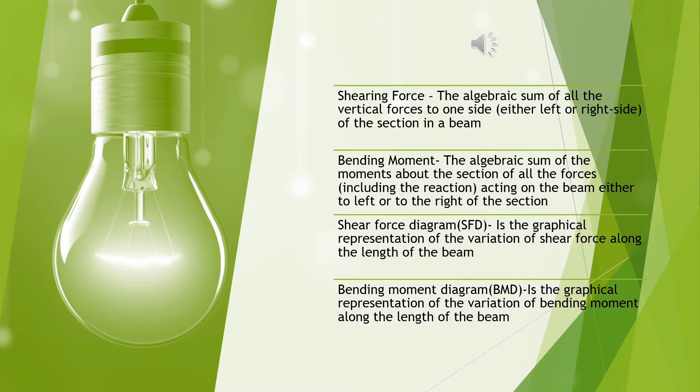In the next slide, we can see a sample of shear force and bending moment diagram of a simply supported beam with a concentrated load at the midspan.

So I'll show you one example of a beam with shear force diagram and bending moment diagram. Hope it will help you in your studies.

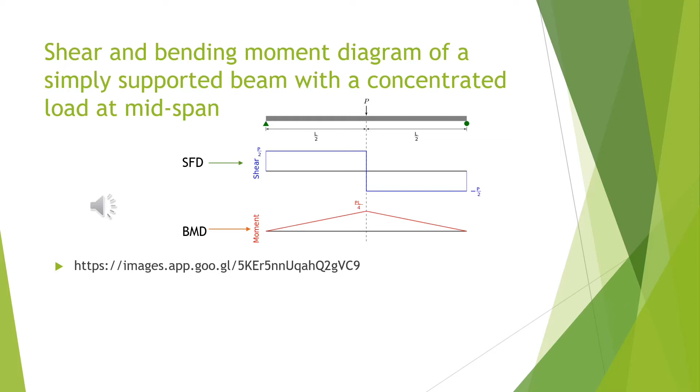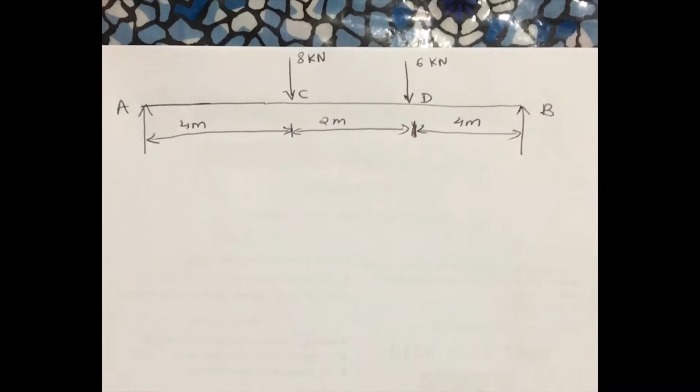Let's find the shear force diagram and bending moment diagram for the beam shown. Let's find the reaction forces at RA and RB.

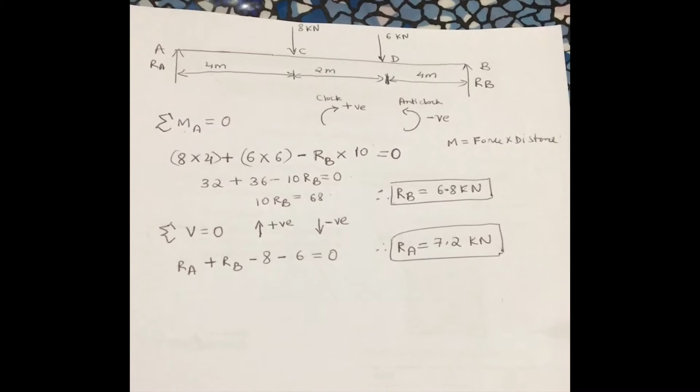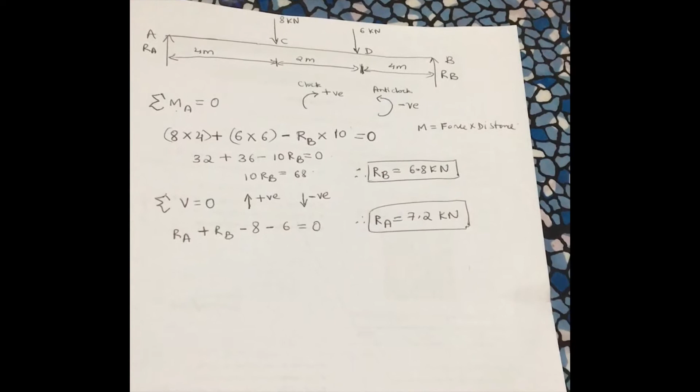For that, let's consider moment at point A as 0, summation of moment at point A as 0 when moment is force into distance. Since 8 kilonewton and 6 kilonewton are pushing the beam downwards in a clockwise direction, it is considered positive force.

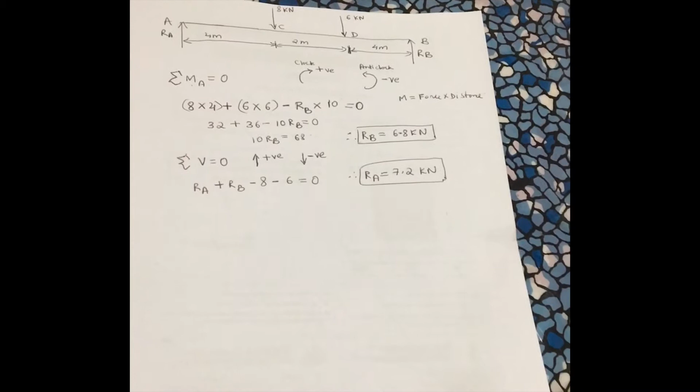So 8 into 4, moment is force into distance, so moment of A from the point C is 8 into 4 plus moment of A from point D is 6 into 6 distance, and since the RB force is pushing the beam upwards in the anti-clockwise direction, it's considered as minus RB into 10.

So we get the value of RB. And next is the summation of all the vertical forces. Upward force is considered as positive, downward force is considered as negative. From this we get the reaction value at the point A.

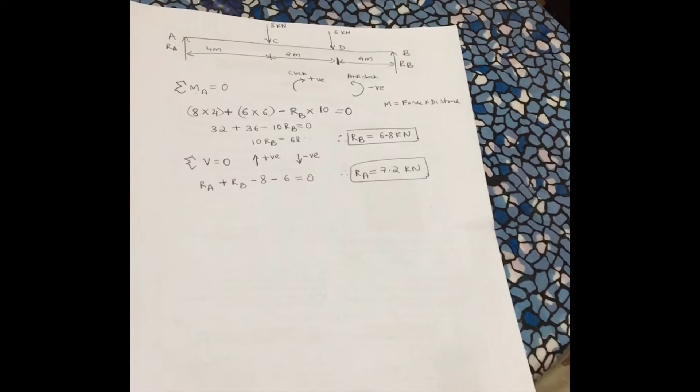And for the moment, just remember that the 8 kilonewton and 6 kilonewton are pushing the beam below like this. So moment at A, 8 kilonewton is rotating the beam in the clockwise direction, so it is positive.

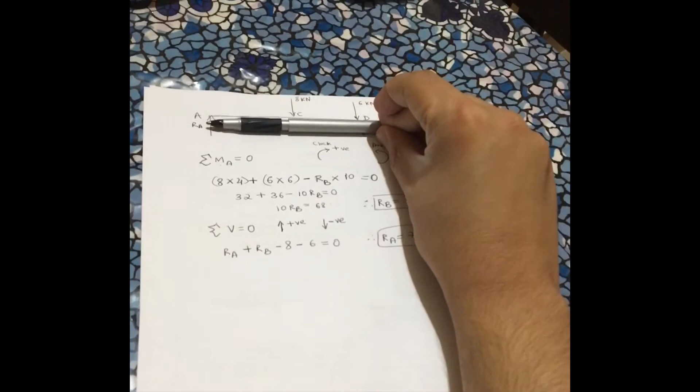Moment at point A with respect to force D is making the beam rotate in clockwise direction, so it's positive.

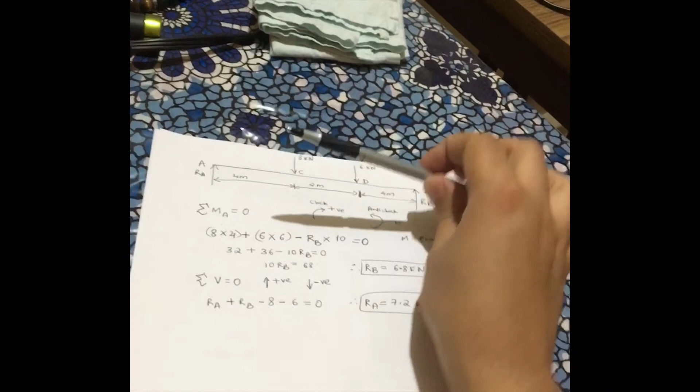And when you consider with point B, the RB is pushing the beam in the counterclockwise direction. Just keep your pen at the point A and just consider the RB, and it's pushing in this direction.

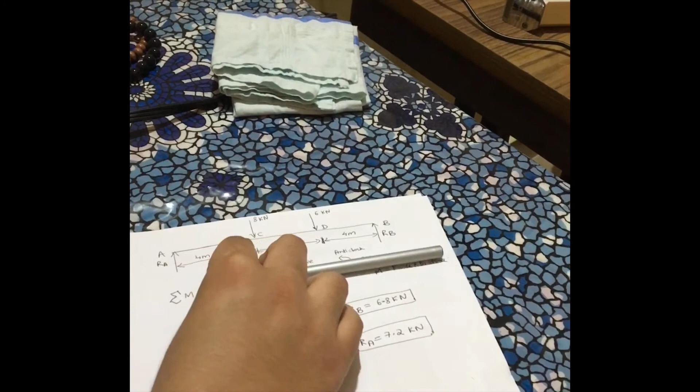Calculation of shear force diagram. The upward force is considered positive, downward force is negative. Let's consider at FA, which is equal to the reaction force RA, that is positive 7.2 kilonewton.

Between A and C there is no other load, so at FC, between A and C, which is considered as FC, that is 7.2 kilonewton minus 0. There is no force, so the 7.2 kilonewton remains constant.

So at the point C there is 8 kilonewton, so since it's going downwards it's considered negative, so plus 7.2 minus 8 is equal to minus 0.8 kilonewton.

And between C and D, which is FD, that is equal to minus 0.8, which remains constant. So minus 0.8 minus 0 is minus 0.8 kilonewton.

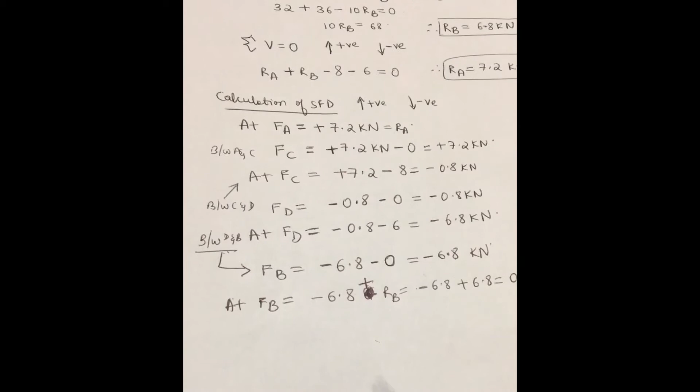At the point D, we have FD, that is, we'll carry the previous minus 0.8 kilonewton and subtract 6 kilonewton since it's going downwards. Then between D and B we have FB, which will remain constant since there is no load between D and B. So minus 6.8 kilonewton is constant.

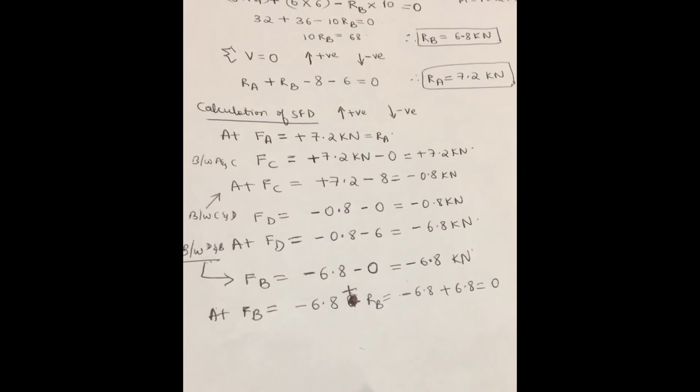At FB we have reaction force RB acting, so minus 6.8 plus RB, since the RB is going upwards it's positive, so minus 6.8 plus 6.8 is 0. When you draw the shear force diagram, we got the RA value as positive, so consider this as the 0 axis, this is positive y-axis and negative y-axis.

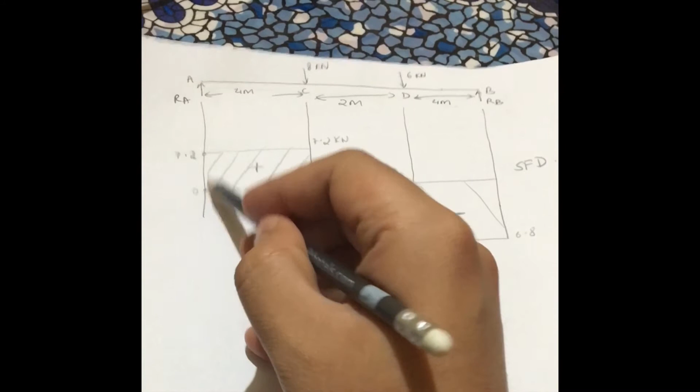So since we had got RA as plus 7.2, we'll mark a point at 7.2, and since there is no other load in between C and A, it remains constant, so we mark the next point at 7.2.

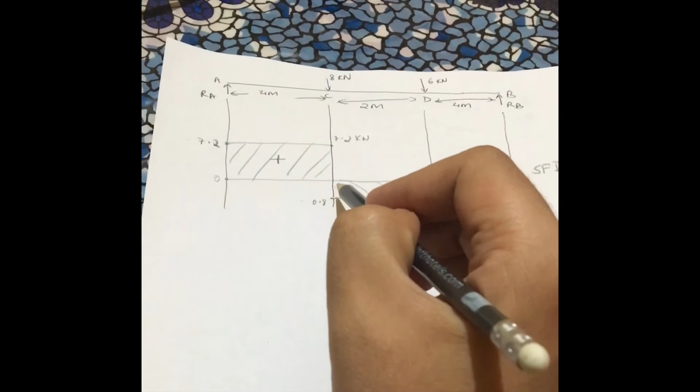And since we got the vertical force at C as minus 0.8, we go down to 0.8, and then since there is no load between C and D, the 0.8 value remains constant.

We draw a line as below, and at D we get minus 6.8, so we go down below till 6.8 and we mark 6.8 over here.

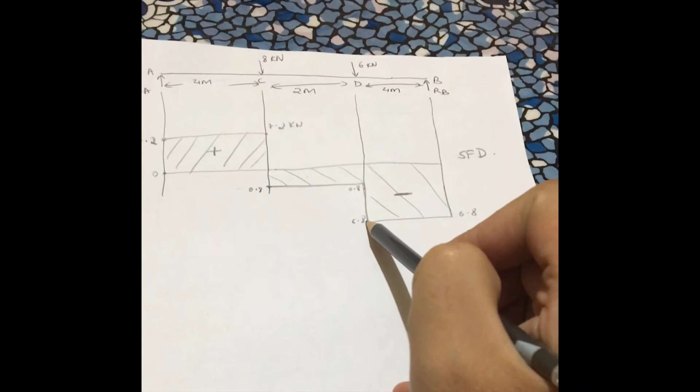And since there is no load between D and B, the 6.8 value remains constant, and since RB is 6.8, we close at B. So this is the shear force diagram for the above problem.

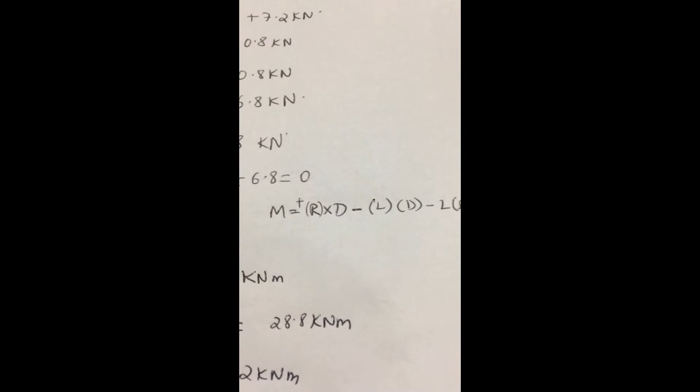For bending moment diagram, remember this formula: M is equal to R into D minus L into D. L is the load, R is the reaction force.

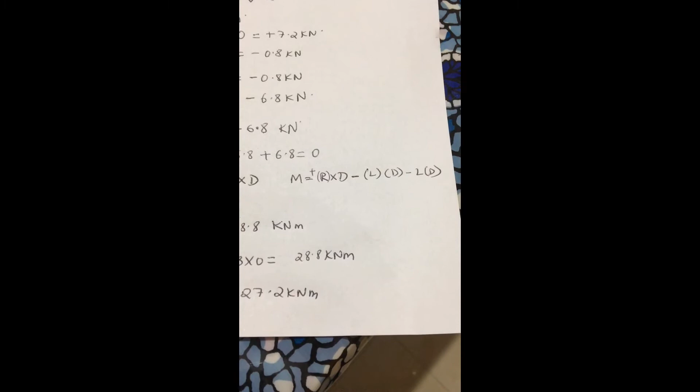So moment at A is 0 since there is no moment at the point A, and moment at B is 0. To find the moment at C,

just keep this point, so we know the reaction force 7.2 kilo into 4 and minus 8 into 0.

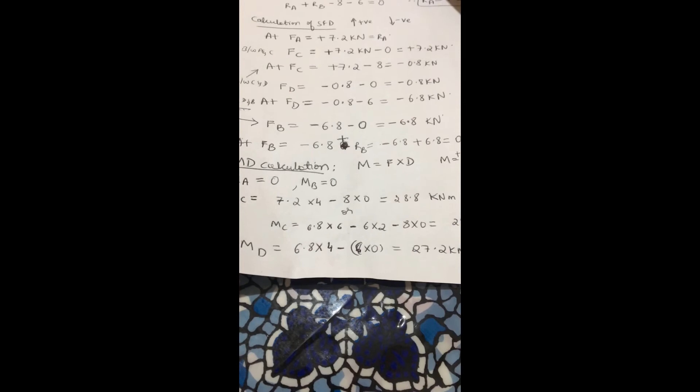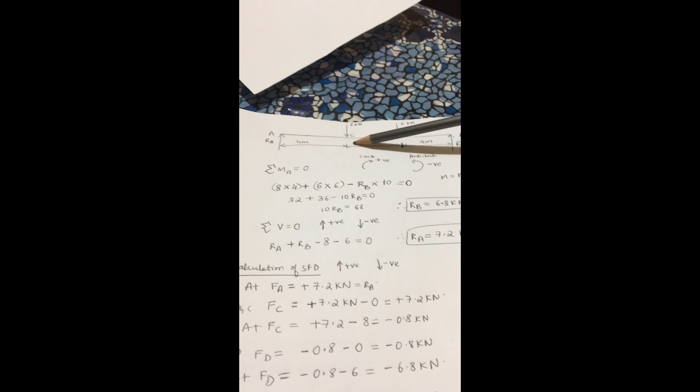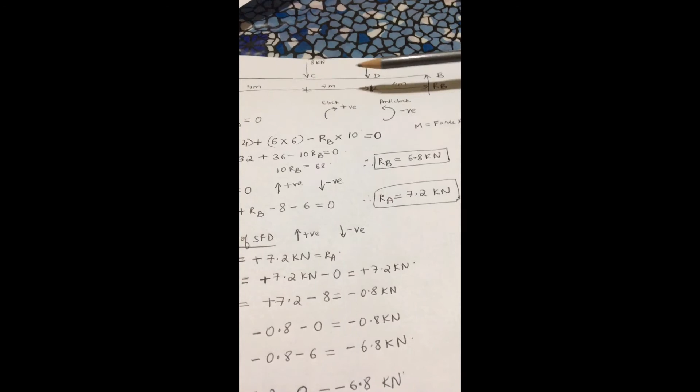So MC can also be found out in the other way. Just keep a point at C, so R from here will be RB, which is 6.8 kilonewton into the distance from here to here, which is 6, so 6.8 into 6 minus the 6 kilonewton into 2 minus 8 into 0.

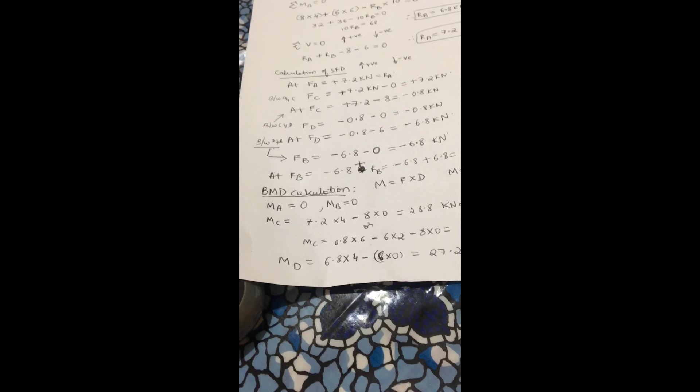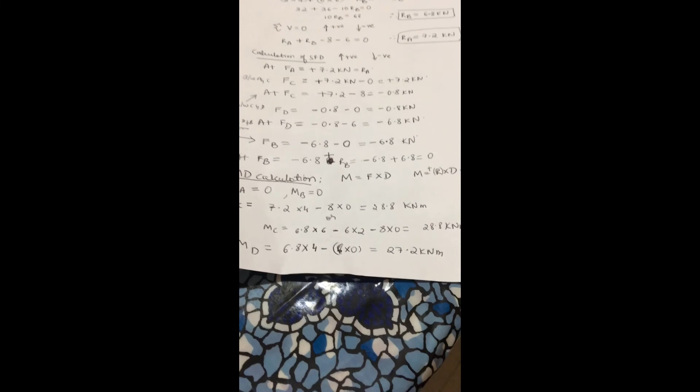At C there is no distance, and at MD you have to find RB into 4 minus 6 into 0. RB is the reaction force, so R is the reaction force, D is the distance.

So you either start from left or right.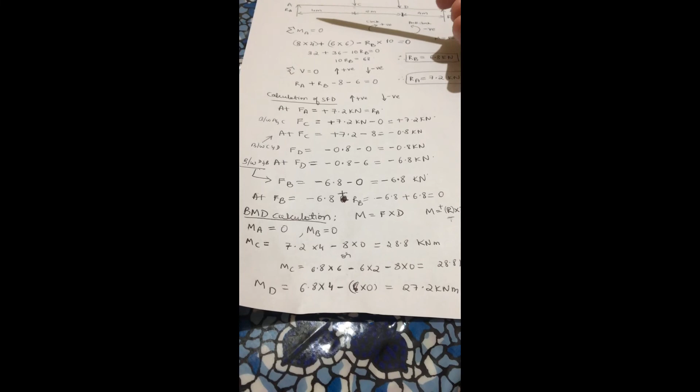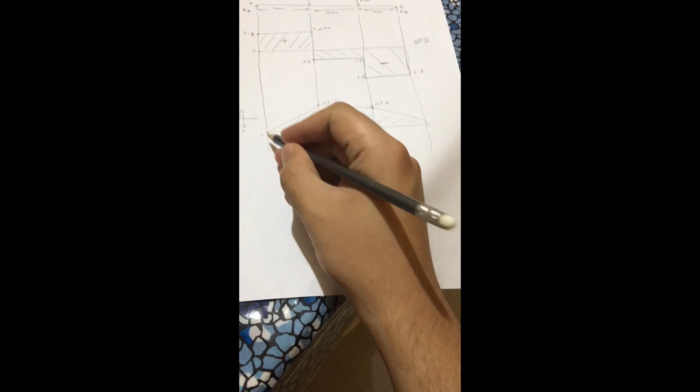Since we have found all the moments at respective points A, B, C, D, so at A it's 0, and at C, moment at C is 28.8 kilonewton meter.

So we mark a point and draw a line, and at D, moment is plus 27.2 kilonewton meter. So just below 28.8, a little bit down, then you join like this at the point, and MB is 0, so this is the 0 point.

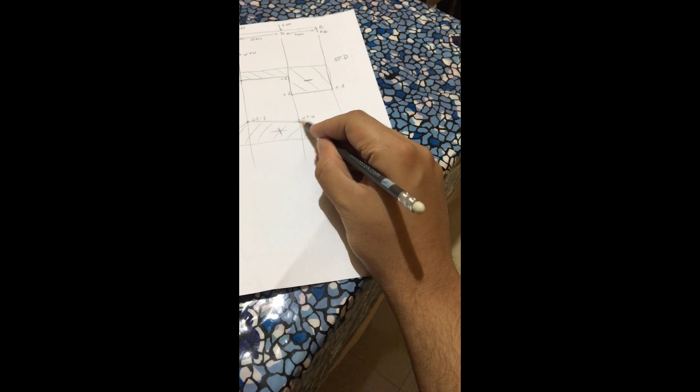Just from 27.2 draw to 0, so this is 0. So upward is positive, downward is negative. So this is the bending moment diagram.